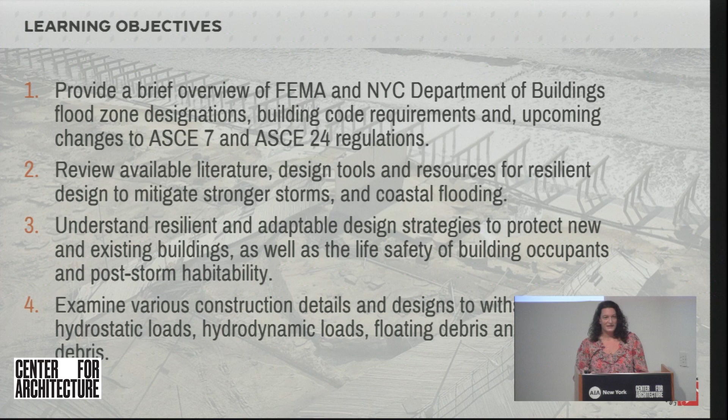We are going to be talking about resilient design, in particular with flood and hurricane mitigation projects in New York City. And here are the learning objectives. I won't read them, hopefully you're here so you've read them and you know what we'll be going through.

So like I mentioned, I'm a Senior Project Manager at SGH, particularly focusing on the building enclosure, building technology side of things. A mix of new design, investigation, rehabilitation, and custom glazing systems.

Edwin Tang is the founding principal at Tang Studio Architect, and he sits on committees for New York City Construction Code Revision and ASCE 24. He is a certified floodplain manager with the Association of State Floodplain Managers.

Daniel Kinsley is an associate at GMS. He's in the Building Envelope Consulting Group at GMS and has worked on a wide variety of projects, including facade restoration, repositioning, overcladding, as well as new construction in the commercial and residential markets, featuring designs in curtain wall, precast, and masonry.

And last but not least, we have Jessica Mandrick, a partner at GMS, who has provided structural engineering services for numerous buildings located in hurricane and flood hazard areas. She served on the ASCE 24 Urban Flood Study Team after Hurricane Sandy and assisted with Sandy recovery efforts. She is Vice Chair of the ASCE 24 Flood Resistant Design and Construction Committee, a member of the ASCE 7-22 Flood Load Subcommittee, and Vice Chair of the New York City Building Code Flood Resistant Construction Committee.

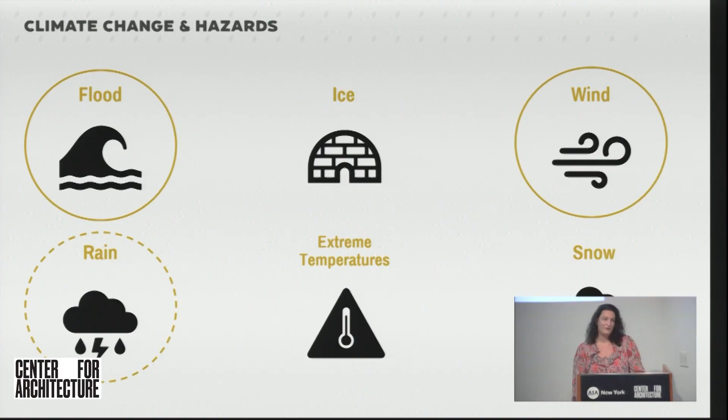There are multiple hazards. As I mentioned earlier, we'll be focusing on flood and wind tonight, including rain, because that affects flooding and is often in combination with high wind events.

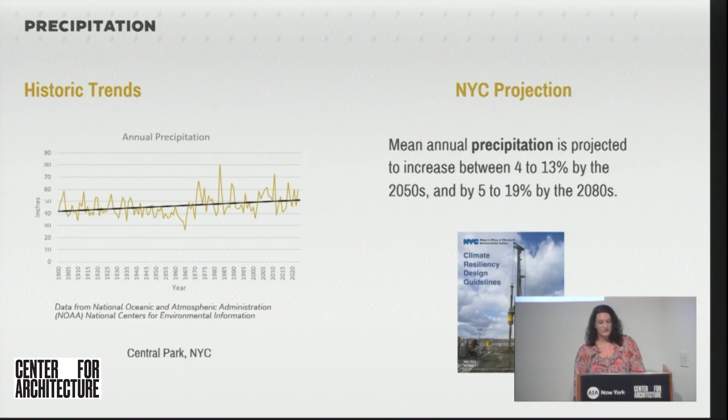With precipitation, we see similar trends. They're increasing through the years. The mean annual precipitation in New York City is projected to increase between 4 to 13% by 2050, and by 5 to 19% by 2080.

And we've seen these storms, right? Winds and high winds and intense storms. We anticipate that they will continue to increase in frequency and intensity through the years.

As I mentioned, current codes are primarily based on historic data. They don't account for these projections. They don't account for the trends we've all been seeing and living in recent years. There are, however, codes and standards that committees are in the process of accounting for these future projections. They're just not quite there yet.

So we're anticipating in 2028 an edition of ASCE 7, which provides loads for designing structure and components and cladding, and that this version will include some of these projections for changes we've been seeing in flood and snow and rain and ice and wind. So that's kind of what the future holds.

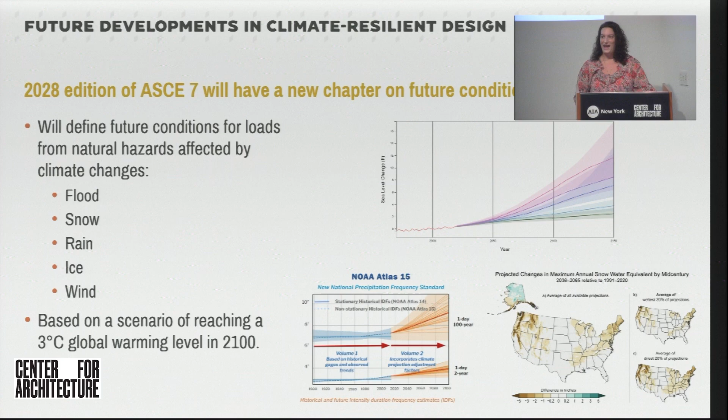This is your introduction to hazards and climate change, and I will pass it on to Edwin for his portion of the presentation.

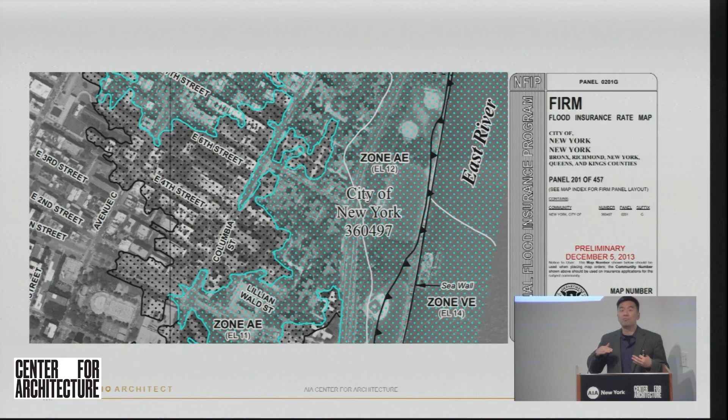From the flood maps, you know where you are and the elevation of the water that you have. As a design professional, there's other information we have to collect. We need to know the grade elevation that your site is situated on, and also you need to know the codes.

The current codes have been revised. Pretty much whatever your flood zone is, the codes require an amount of freeboard that is usually 2 feet for most occupancies. You basically subtract the grade elevation from your flood map to determine how high the water will be against your building envelope. That's called flood depth.

Here's a project that I worked on, on the west side of Manhattan. It's a slope site, so from the maps I know that my design flood elevation is 14. I added 2 to the base flood elevation of 12 that I read off the map, then I looked at the architectural survey for the grade elevations.

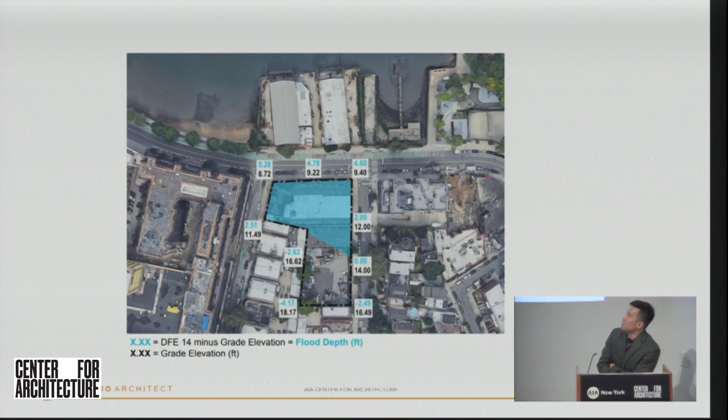You can see the black numbers as the grade elevations, and you can see that as you go inland, the land is higher. The blue represents the flood depth, which is the design flood elevation minus the grade elevation — that's how high the water is. There's a point where it becomes 0 as you're midway uphill; that's the 0,0. The negative just means the water will never reach that area of the site. So this is how you first understand how high the water is around your building.

Then you look at the relevant regulations, and there are quite a few. It starts at the federal level with FEMA and the National Flood Insurance Program. They publish a series of rules and guides for what you can and cannot do to qualify for flood insurance, which is required for sites located in flood hazard areas.

Then at the state level, it sometimes impacts a project if you're located near tidal wetlands or freshwater wetlands — there's additional regulatory hurdles to go through. The local level is usually the most intense; you're dealing with regulatory agencies of New York City, the buildings department, the fire department, transportation, and also city planning for zoning.

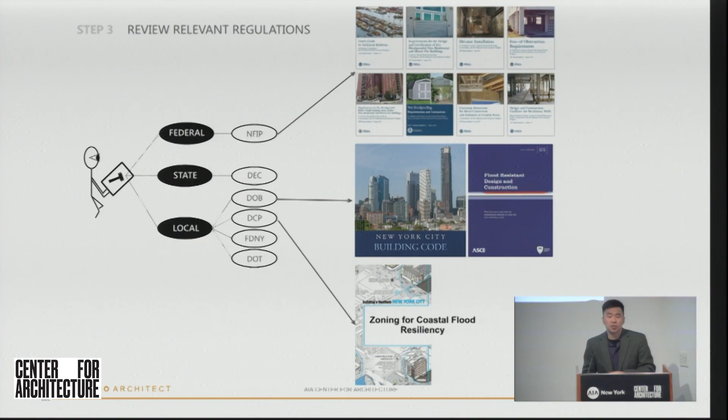As far as identifying your adaptation strategy, at a very high level there are two categories of projects: those that trigger compliance by the nature of the work, which is either new construction or buildings that are substantially damaged or substantially improved. If you're in that category, the standards and codes apply to you. So for residential and non-residential uses, you can always elevate your lowest occupied floor to be above flood elevation.

But when it comes to intervention measures for flood resiliency, if you have spaces located below design flood elevation for residential use, your options are very few. You can only wet flood proof, and you can only have spaces that are parking, storage, and building access — basically no occupied spaces.

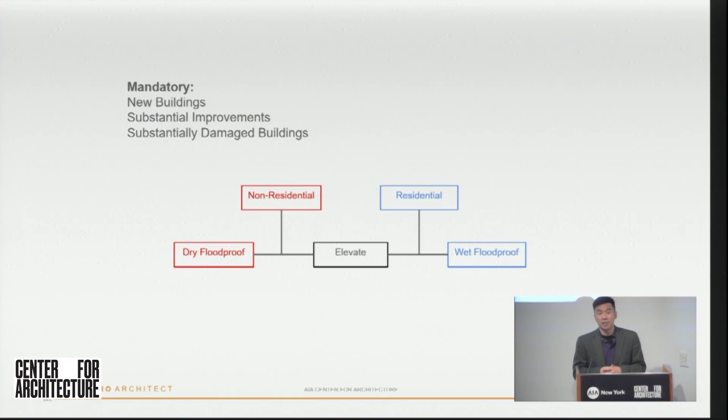If you have commercial or other non-residential uses that are below grade, your only option really is to dry flood proof. We'll go into what wet flood proofing and dry flood proofing means, but it's important to understand that you can always elevate, and that's the passive approach.

Now, there's also a category called voluntary flood hardening, and that's when you have a building that doesn't trigger compliance, meaning the scope or area of work is small. You're in a flood zone, but because your scope is so small, you're not forced by the codes to comply. In those instances, as a building owner, they still want to have some protection.

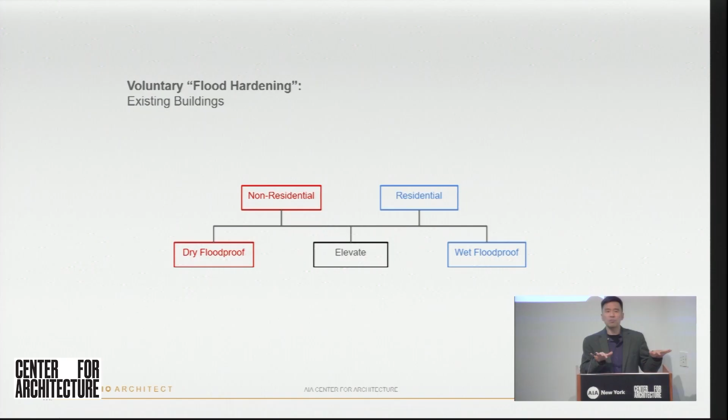In the old days, it was sandbags. Nowadays, there's a lot more products on the market that allow buildings to protect themselves. In that category of voluntary, you are a little more free to choose different options because it's not required. It's more of a voluntary approach. So all these options of wet flood proofing, dry flood proofing, and elevation are available.

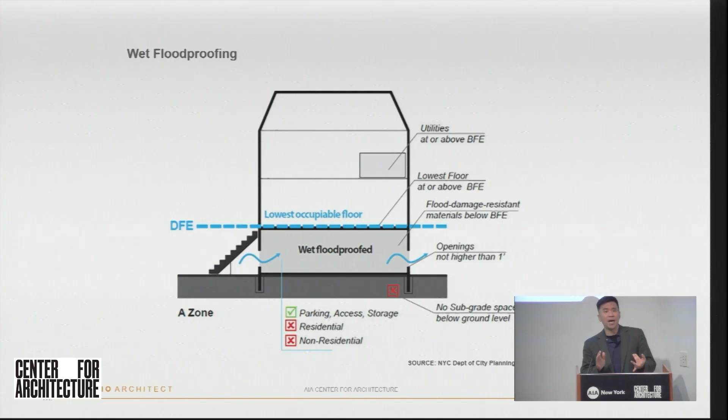So just to kind of quickly review, what does it mean to wet flood proof a building? Essentially, you're letting the water into the building. The reason you do that is a lot of these existing buildings or structures designed before flood regulations came into play were not designed for lateral loads from water—hydrostatic pressure, hydrodynamic pressure, floating objects that may impact the side of your building that's not designed for seismic or any kind of lateral load.

If you don't do this, what happens is water will build up on one side, the exterior, and exert pressure against the building wall that may cause it to collapse. In order to avoid that, wet flood proofing mitigates that uneven pressure to create a balance so you don't have uneven loading against the wall.

And the vents have evolved to have more options. Some are insulated, some are ventilated, some are fire rated in certain instances that require fire separation. And these are all passive.

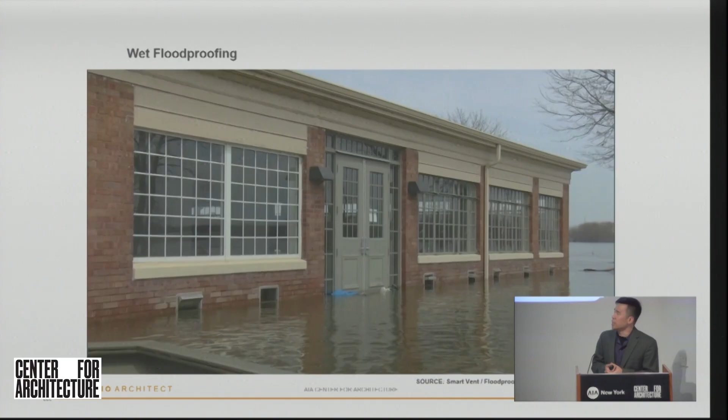The way they work, there's a formula based on how much water is anticipated and the area within the building that needs to flood, and the formula tells you how many of these openings you need to provide along your facade. The standard is you always have to have 2 openings. They normally need to be on 2 separate walls, to prevent them from clogging or getting blocked—it's just a kind of backup.

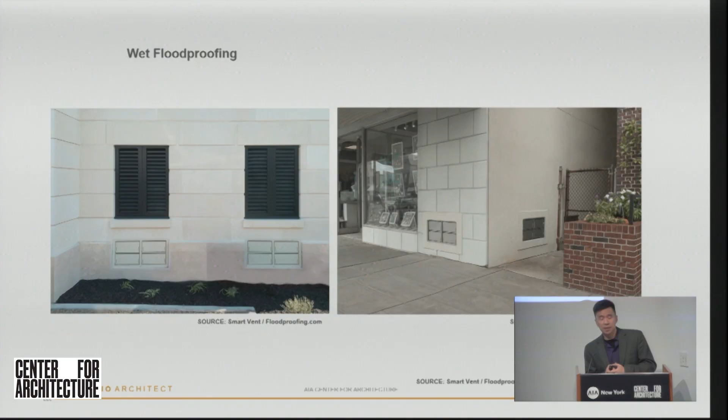A lot of times, depending on how much area inside the building needs to be protected, one vent may not be enough. You may need to stack them in an array and have multiple openings to meet the required area.

And then dry floodproofing—it's just the opposite. Don't let the water in, keep it out. You're keeping the spaces dry that are located below the flood elevation, and that's not only above grade, but also below grade.

So these are more involved as far as structural design. You need to make sure the building can take the loads. And there are basically 4 types of load from ASCE 7 that apply to these situations.

It's hydrostatic, which is still water; hydrodynamic, which is waves; impact loads, like floating logs or floating vehicles; and then you have wind loads too. So when you design, you talk to the structural team, and as they design it, they have to apply all these loads simultaneously.

So there are 2 categories of dry floodproofing options on the market. They're broadly categorized as active measures, which require human intervention and a flood emergency plan. And then you have passive options, which do not require human intervention—they basically are a set it and forget it approach.

Like you have the flood barriers that are embedded into the grade, and they're actuated by water—the rising water will cause this gate to lift automatically. And you have flood resistant glazing, which has nothing to do, doesn't move, no moving parts.

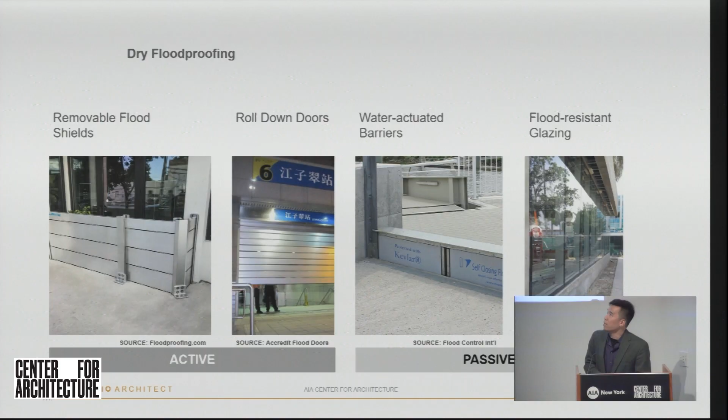So from my experience dealing with projects, both from the regulatory side at the city and also in private, most building owners will elect to use flood shields because they are the most economical, the least disruptive as far as architectural impacts to the facade, and also they are kind of simple to install.

So I'm going to speak a little more about temporary removable flood shields, the very first one on the left.

These are usually aluminum planks to be lightweight, so that it's easy to carry out of storage, and they have rubber gaskets all around them. When you elect to use this option for protecting your building, you're required to provide a flood emergency plan, which is a big manual that shows you - I'll give you an example at the end of what it means.

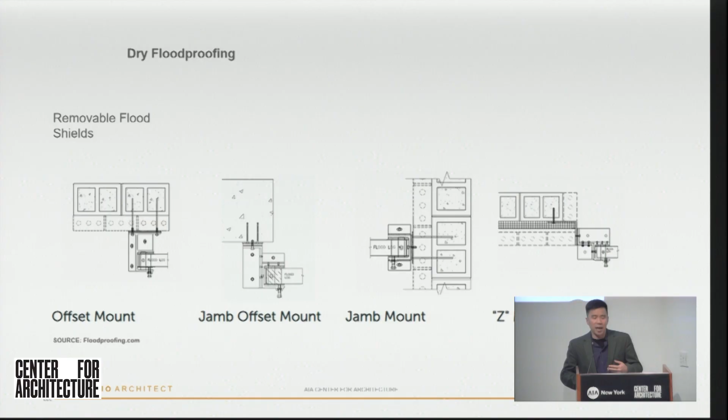It requires drills, storage, tools, and trained personnel to deploy them and know when to deploy them. There are so many vendors of these products right now. These are examples of how you can architecturally hide the embeds because they attach to the building, both on the walls and also where the spans are longer - there are intermediate posts with embeds usually in the sidewalk. So here are some details for connections to the facade and to the sidewalk. These are all usually engineered by the vendor and suited to be compatible with the architectural materials and language of your facade.

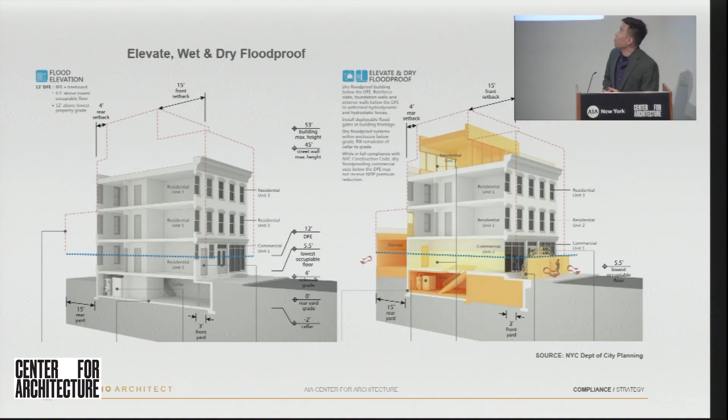Once you know the strategies available to you as a design professional for your project, you have to design your building. So here's an example of a mixed-use building. You have retail on the ground floor, residential on top. As we apply the concepts, you can only dry flood-proof commercial, so you see the flood shields, and you're required to maintain egress after the flood shields are up - so you have those crossover stairs. The residential units are elevated, and the lobby needs to be wet flood-proofed. Any subgrade spaces can only be for commercial use because you're not allowed to dry flood-proof residential where you are triggered to comply. Again, if it's voluntary, you have a little more leeway.

Let's look at a real project that I worked on - a new development in Brooklyn. It's a double corner lot, residential with ground floor retail. Since it's new construction, we have to comply - we don't have a choice. So residential needs to be wet flood proofed, residential portions and spaces in the building, and non-residential spaces can only be dry flood proofed.

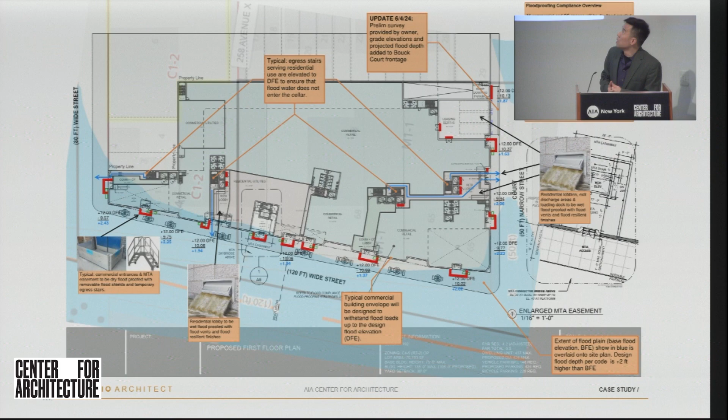Then you have the areas with the blue arrows - those are the residential lobbies and exits. By code and by the standard, they have to be wet flood-proofed, which means water is allowed to go in and out without human intervention. So they will have flood vents at the doors, at the glazing, at the envelope.

There was also an MTA easement at the middle of the building, which also is to be dry flood proofed. So we have those flood shields. The design elevation is 2 feet above grade, the flood depth - so two planks and the crossover stairs.

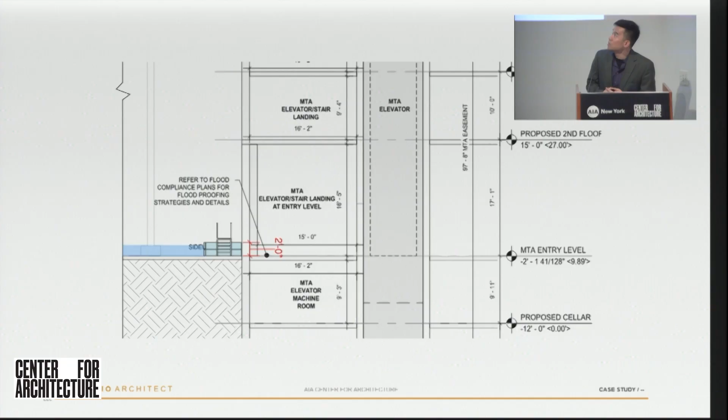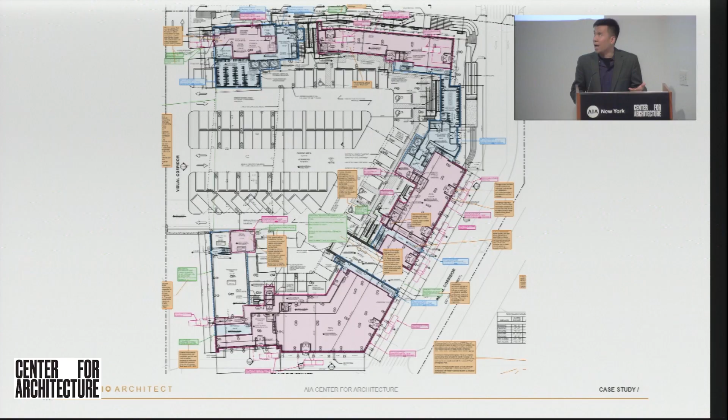The interesting thing for this project is because it's a government subsidized or government funded project, they elected to plan for future sea level rise. So the design flood elevation is a minimum - it doesn't mean you can't go above it. The solid blue line is the code minimum design flood elevation you have to design to. The dashed blue line is what this project owner decided to protect against - a good 6 feet above the minimum, planning ahead for the future.

So their residential areas are wet flood proofed to 6 feet above the minimum. The red is the commercial spaces - because of tenant sensitivity and insurance concerns, commercial tenants chose to go even further, up to 8 feet above the minimum. This shows you how some projects will go above and beyond code.

And the other reason was it ties into the zoning floor area calculations as well, because wet flood-proof spaces have a lot of options for floor area deductions. So by deducting entire levels on grade, you can get additional floors, additional square footage for the project.

There are some gaps right now. A lot of the regulations deal with coastal flooding.

Here's another case that I worked on, a project in a shaded X zone where there is no base flood elevation on the maps, and no code requirement to provide flood proofing, unless it's institutional or hospital occupancy. This is a residential mixed-use occupancy. They technically didn't need to provide flood proofing, but they are located right at the boundary between an X zone and an A zone, which has a flood elevation and requirements.

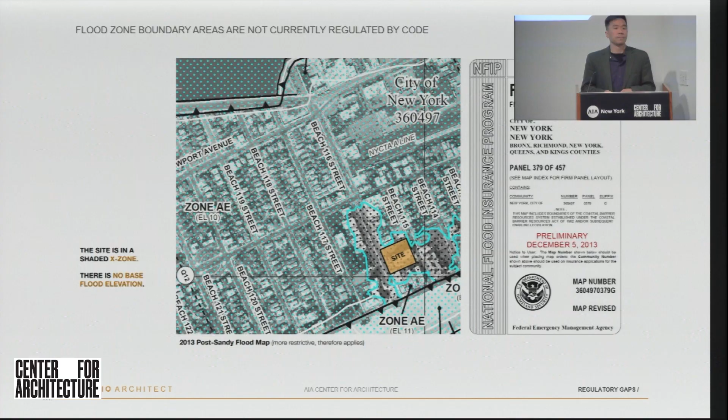Yeah. Insurance issues are also there. Excuse me? Insurance issues also there. There's an insurance issue there? Oh, yeah, insurance issue, for sure.

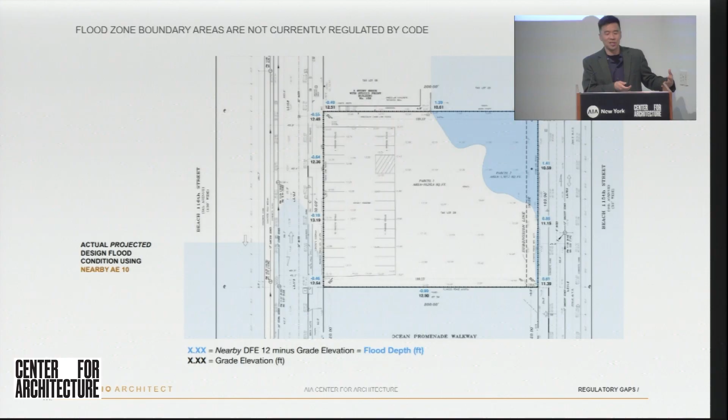So here, the client decided, per my recommendation, to provide for this reality, because the project is subject to flood even though the map says it's not. So this is kind of an interesting gap that exists. A lot of the FEMA maps are talking about coastal flooding, sea level rise, and storms.

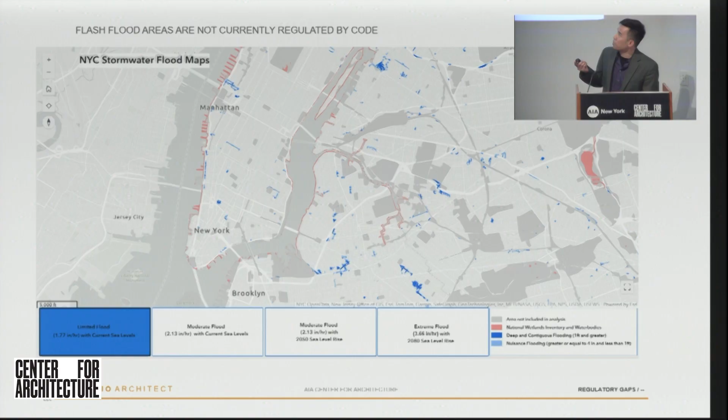But the reality is, as you may have heard in the news, there are instances of flash flooding inland away from the coast, and the FEMA maps will not cover this. New York City has started to map these areas based on incidents. Currently you have low risk, and as you go with the projections toward extreme scenarios in 2080, you really see a lot of pockets of inland areas subject to serious flooding. That's currently not in the regulations.

There are efforts throughout the city to start planning for this. Especially for HPD projects, where they elect for enterprise green community incentives, there is a design criteria for stormwater management. So you need to design for your site — if it's really sloped, with driveways going underground, you need to deal with that anticipated storm flow.

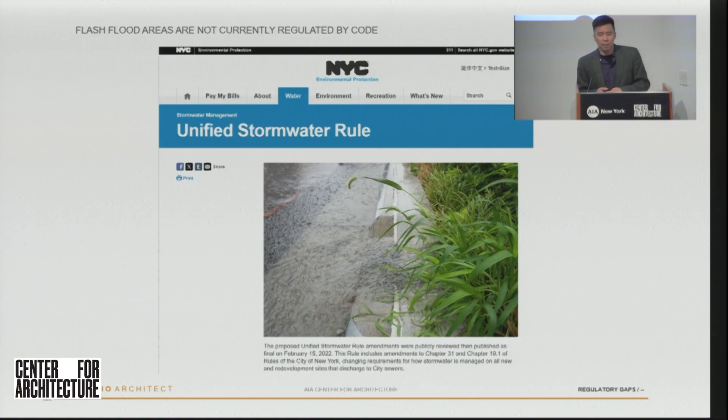The city also has a unified stormwater rule through DEP, but that's more geared towards infrastructure and streets. There's no direct mandate on a specific site to deal with this.

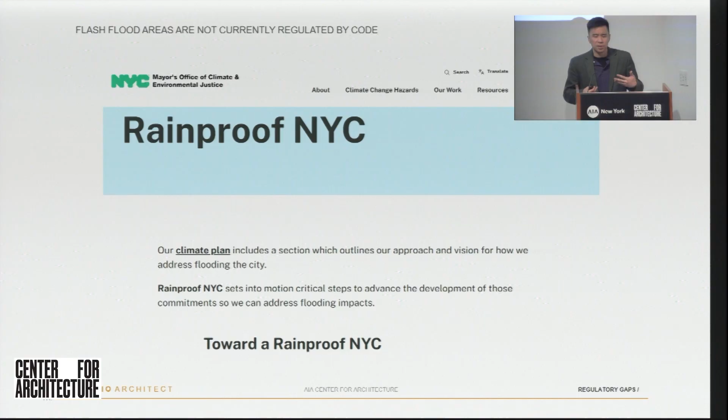There are also efforts from nonprofit groups to develop recommendations for how to better address flash flooding in the city, in partnership with the mayor's office. There's an effort with Rainproof NYC to start developing criteria for how to protect against this.

You need to rehearse, get your supplies and your actors in place, and then it sits idle for years sometimes. People turn over, the gaskets wear out after a few years and don't work, someone loses a few pieces. What good is it if you spend all this money as an owner to provide this, but then it doesn't work when you really need it to? That's probably the biggest challenge I've seen across many projects.

And this is just another interesting case that I deal with a lot on projects in the city. I mentioned earlier when you have flood vents for wet floodproofing, they have to be on 2 walls. Well, you have a lot of attached buildings in New York City. There's only 1 wall, so what do you do? I don't have 2 walls.

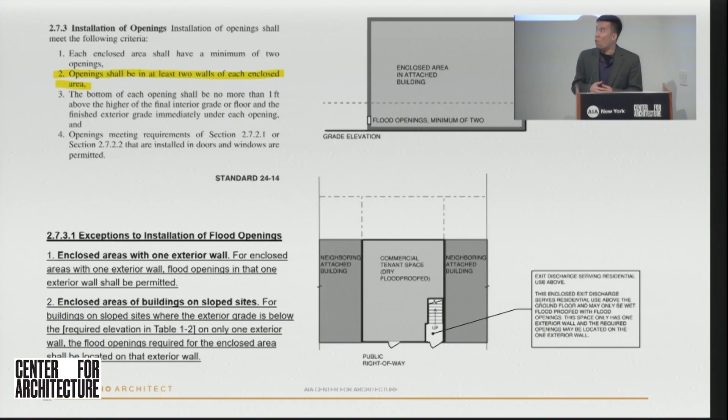Or I'm on a sloped site where the back wall is higher and the flood water will never get to the back. So what good is it if I put my flood vent in the back? So we made a proposal in ASCE 24 to allow certain instances where there's only 1 wall that makes sense to put all the flood vents in that 1 wall.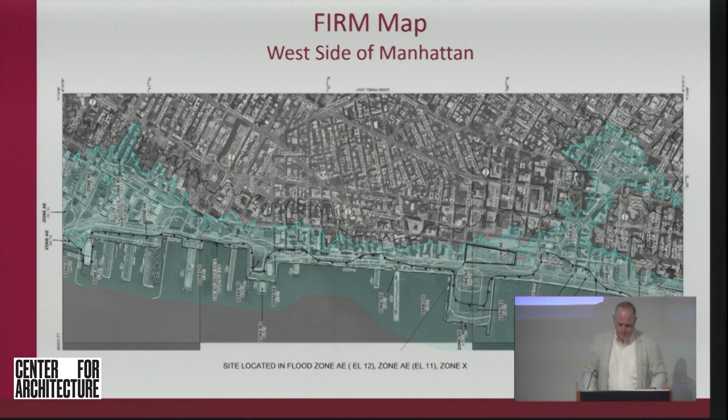So wet flood proofing, we talked about this a little bit. As we heard earlier, the rising floodwaters apply pressure to a building structure and cause damage. The hydrostatic pressure of water pressing against a foundation can cause entire homes to dislodge from their foundations during storms. The concept of wet flood proofing is to eliminate that one-directional pressure on a building and allow the water to get to both sides of the wall, therefore equally distributing that pressure and allowing it to rise equally on both sides.

So this first project I'm going to talk about is a residential project with ground floor retail. We spoke about the residential spaces requiring wet flood proofing and commercial spaces having the choice to pursue wet or dry flood proofing. In this project, the architect and the owner elected to use a wet flood proofing strategy across the entirety of the ground floor, both at residential requirements as well as commercial spaces.

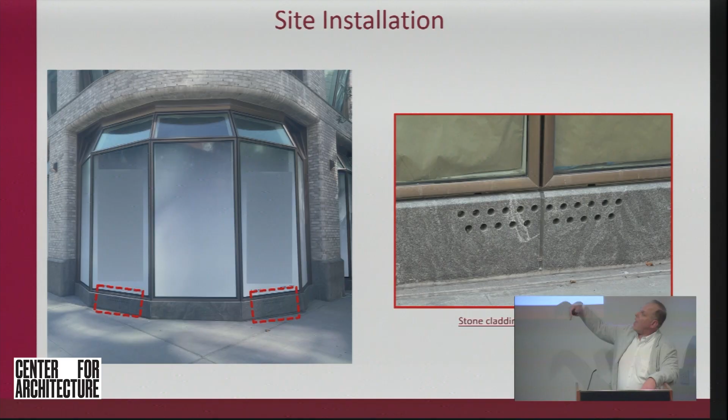So this is the finished example. What you'll see is the glazing comes down on top of the curb down to grade below DFE, and the architect didn't want to see the flood vents, right? They didn't think that was aesthetically pleasing. So what they did is put stone cladding in front of the flood vents and perforated it with several holes that would allow the water to fill in past the stone, fill up the cavity, and then trigger the flood vents and allow the flood waters into the building. Kind of clever.

Now, some of you may be more well-versed in wet flood proofing, so I'm going to spend some time on dry flood proofing applications specific to glazing systems, as it's becoming increasingly popular. Dry flood proofing is, as you'd imagine, strategies for resisting floodwaters and preventing water from entering our buildings.

In some cases, a site's design flood elevation may be 3, 4, or 5 feet above street level, typically meaning 5 feet of opaque surface. Back in 2020, the New York City Building Department, through their Office of Technical Certification and Research, issued a building bulletin to address the increasing interest in using glazing systems as perimeter barriers for floodwaters.

The building bulletin established evaluation criteria for glazing systems using dry flood proofing in special flood hazard areas, also known as flood-resistant glazing systems, designed to meet the definition of substantially impermeable and to resist site-specific design loads pursuant to ASCE 24. The main performance criteria referenced in that bulletin is set forth in ANSI FM 2510. ANSI is the American National Standards Institute, and they partnered on this standard with Factory Mutual Standards, or FM Standards. FM Standards is a research and testing arm of FM Global, a major international property insurance provider. FM Standards independently researches, tests, and certifies products used to protect facilities.

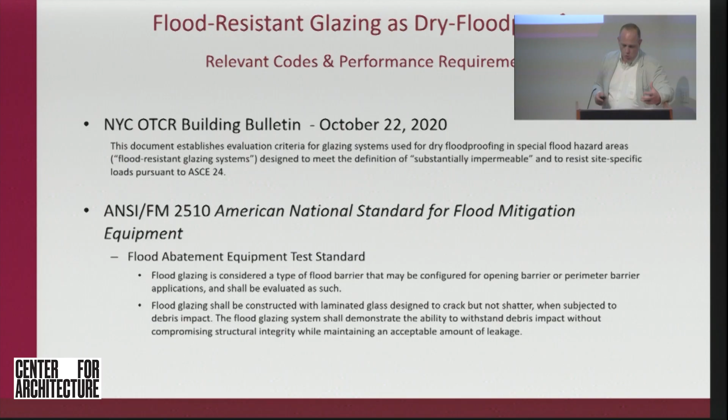We're going to take a look at two project examples that took slightly different approaches to meet this requirement.

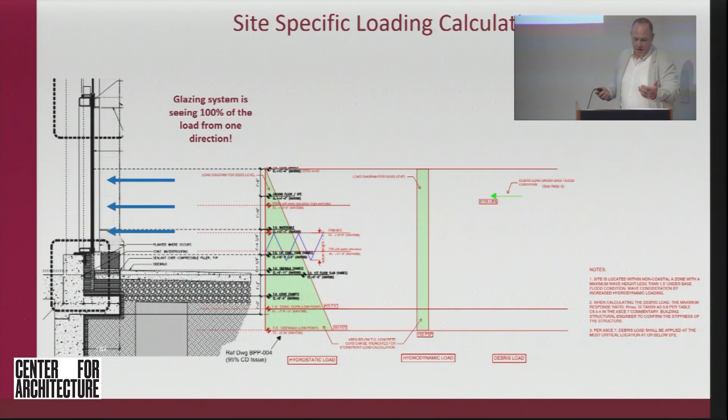The key to this project is using a previously tested system, and I'll get to that in a second. In this section, the detail you see is an example of the calculations put together for a site-specific loading diagram here. The hydrostatic loads, the hydrodynamic loads, the debris loads—all pre-calculated before we get into design. Our next speaker, Jessica, will get a little more into that.

The architect had chosen to—wrong spot there. Per the FM ANSI standard, as I mentioned earlier, laminated glazing is required within flood-resistant glazing systems. The standard says glass is allowed to crack during a flood event, but not shatter. That's mostly due to the debris.

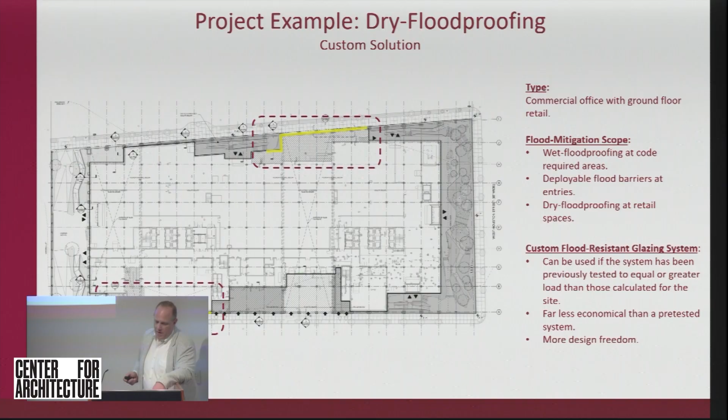That's in some locations. Some of those locations were designated for retail, and the architect and owner did not want 6 feet of opaque surfaces before vision glass started. Prospective retail tenants would prefer pedestrians could look into their spaces from the sidewalk, which is understandable.

This meant lowering the sill of the existing openings below DFE and developing a custom storefront system to meet the flood loads.

The system is structurally glazed with steel mullions. The steel is more robust than your stock aluminum extrusions and can handle the heavy loads calculated for this site, plus the wide spans — we had some openings that were 20, 22 feet.

The glazing resists the loads, transfers it to the steel, and the steel transfers it to the columns and the flood walls that surround them. There's an aluminum extrusion beauty cap adhered to the glazing to match the aesthetic of the standard storefront above, which has your standard extruded beauty cap.

Unlike the pre-tested system, there were more options and customizations here. It just meant it had to be tested. So that's what we did.

The OTCR bulletin requires lab flood load testing if the system is not pre-tested, according to the ANSI FM standard. For this project, a custom mock-up was constructed and installed in a testing laboratory.

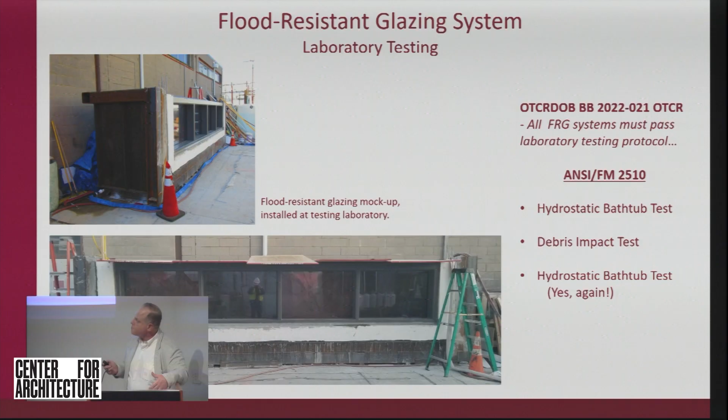As you can see on the left, the tub is being filled with water. The water is left to rest against the system for 24 hours, and they measure the leakage through the system. The allowable leakage is less than a tenth of a gallon per hour per linear foot — very little. There is an allowable amount since nothing is deemed impenetrable, so they do allow a small amount to leak through.

Once we pass that, you move on to the debris impact test. Here they're simulating a telephone pole: they've taken a piece of wood and mounted it to a metal hammer, lifted it on a lift, put it inside the tub, and simply drop it. It's very simple.

They drop it against the glass, and sure enough the glass breaks — the outer light breaks, and there were some small cracks on the inner laminated light, but that was expected. Once that's done, they fill the tub back up with water and let it sit for another 24 hours, testing the leakage again, because even after the damage, the system still has to perform.

Okay, now the testing is complete. These units start to be fabricated and installed out in the site. On the exterior, you can see the location of DFE +1, and that's the separation of our system. And you can see the separation of the flood glazing and the typical system. From the exterior, they look pretty much the same.

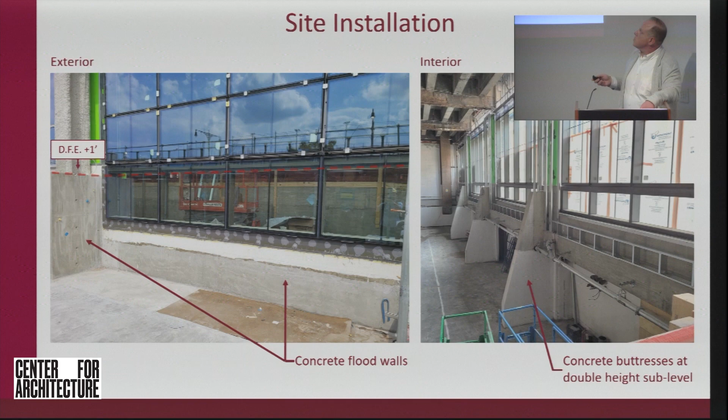During a flood event, the flood-resistant glazing transfers the load to the columns, as I said. In this case, the loads that were calculated were rather high, and we have this double height cellar space in one retail space, so that the sidewalk is actually right up here. Because of the loads that were calculated and how this structure was built, they actually added concrete buttresses to reinforce the columns on one side of the building.

So these are just a couple of finished photos from the exterior. As you can see afterward, you can see where the DFE is. You can see the separation between our flood-resistant glazing system and then a typical stone-clad concrete wall. It actually came out pretty good, I think, and it looks pretty seamless with the typical storefront above.

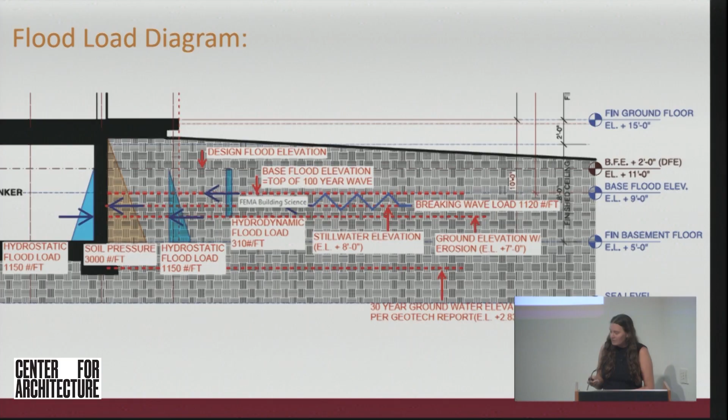In structural design, this is one of the most critical elements, because when piles become exposed, their capacity to resist lateral loads drops. The pile is in bending, and the bending of the pile controls the design of the pile. You need a lot more piles to withstand the lateral load. In most of the projects that I've done, the controlling factor for flood design is what lateral load the foundations can resist.

In terms of a dry flood-proof structure, we talk about buoyancy. In order to resist uplift, to prevent the structure from floating like a boat, the concrete is tied down to the piles with a tension connection. This is an example in a wood pile of a tension attachment. These plates are bolted through the pile. You can stick up to a number 10 rebar through the holes in the plates and engage the piles if there's an uplift force on the foundation, if your building doesn't weigh enough to resist it from floating.

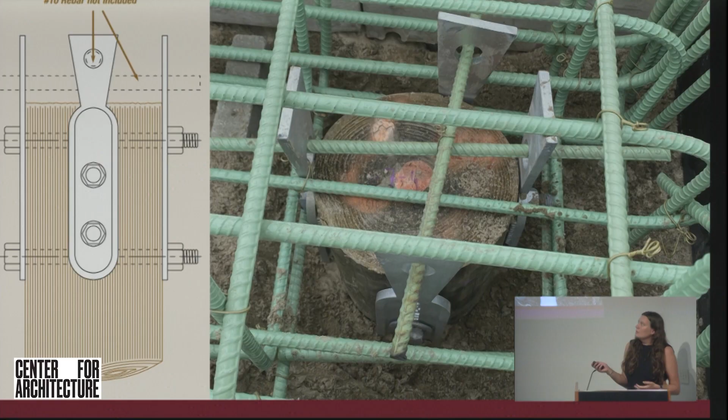For piles, typical construction in a coastal area is a timber pile. Timber piles may not have the bending strength to handle this elevation of the soil being scoured. This is an example of a cast-in-place concrete auger cast pile. You can see there's a cage for the top 20 feet. This pile had about 5 times the lateral rated capacity as the timber pile in the same scour conditions.

This is an example of a dry flood-proofed structure. This is a bunker. You can see here this is the mat foundation. There's a rat slab poured, the rat slab is waterproofed, and the mat foundation is placed above the waterproofing. You can see rebar that's extending up into the mat. These are connected down stirrups that connect to concrete surrounding the piles to engage the piles for uplift.

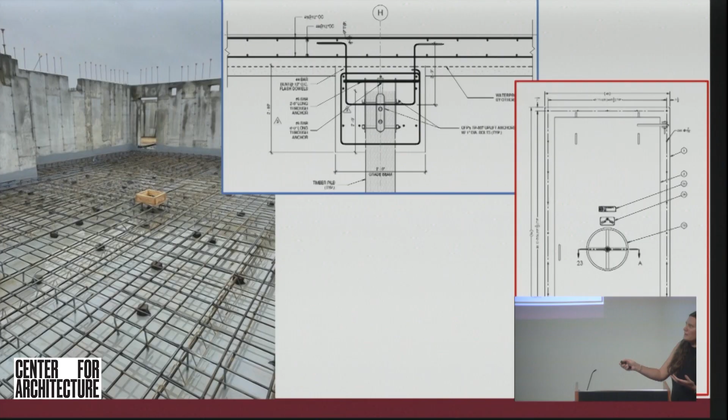You can see in the background there's an opening for a door. If you're doing a dry flood-proof space, a bunker below grade, you can use a flood-resistant door. They look like a submarine hatch. And you can see that any openings out of this mechanical space are at the top of the walls, above the design flood elevation.

In a hurricane, the glazing is often designed to be hurricane-resistant glazing. This is rated for a specific mile per hour and for debris impacts. Each manufacturer that tests this glazing will specify a certain number of attachments around the perimeter of the glazing. What happens when you have multiple panes of glazing together? Sometimes you need to add a structural attachment. This is an example of a plate that was between glazing elements that this glazing edge can connect to with the attachment that's required for the hurricane rating.

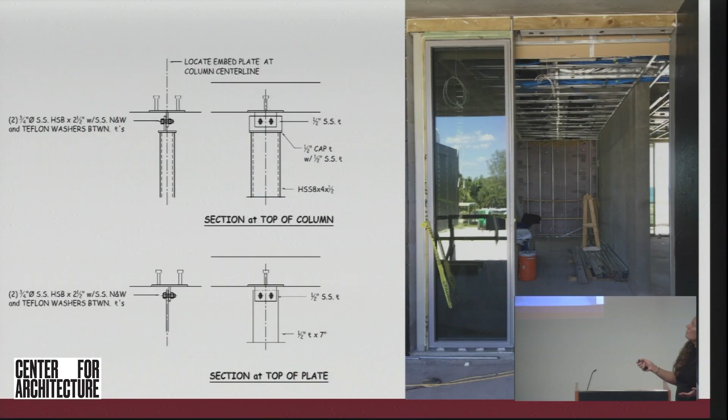When there's a larger space available, you can use a tube. So there's a tube on the left, there's a plate on the right. These have slip connections so that they don't transfer gravity load to the plates from the floor above and buckle them in compression, but they have the bending capacity that's required for the load for the hurricane-resistant glazing.

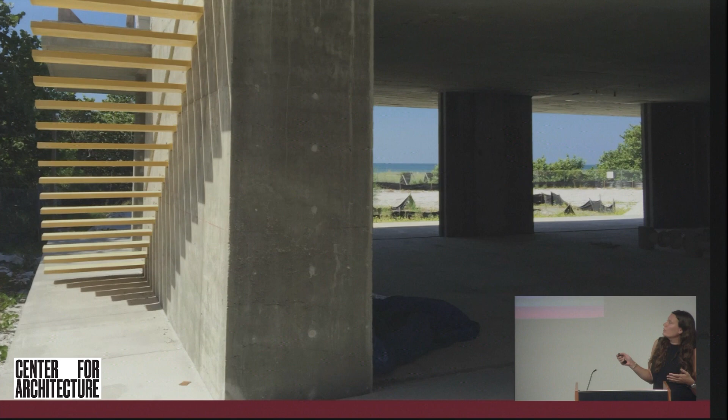This is an example of an elevated structure. You're allowed to have stairs that extend below the design flood elevation and remain in place. This is an open riser so that the flood water can flow through. This structure is elevated. On the next slide, you'll see that pier. It's actually not a solid concrete pier because that would attract too much flood load.

There's actually a breakaway panel in the middle that would be knocked out in a wave impact or in a flood, so that only the concrete on each side is subject to flood loadings, reducing the total overall load on the structure.

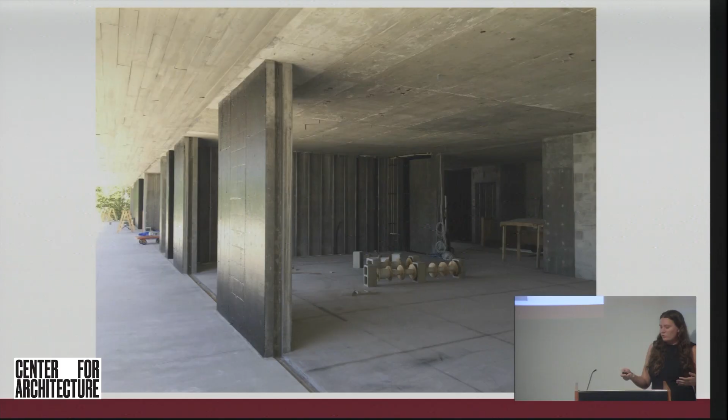So those are a few structural items. Now I want to talk about where the code's going, what's happening next.

So historically, everything in flood has been based on NFIP. The National Flood Insurance Program started after Hurricane Betsy. People were sick of having flood losses. The government stepped in to offer this program. You pay for insurance, you can have your losses covered. And the program was fairly successful initially.

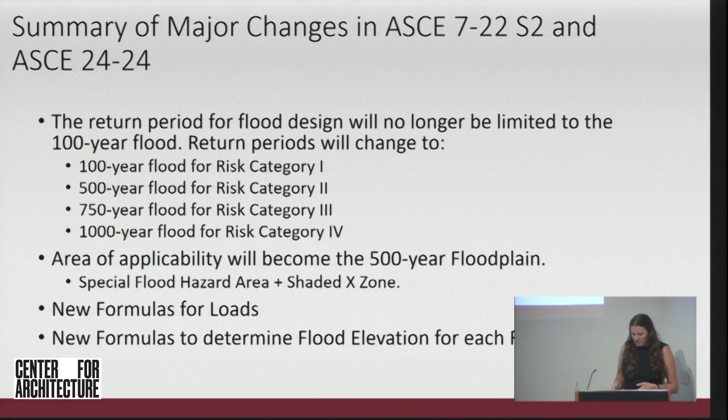And so you have these areas, high density areas in lower Manhattan that don't have any protection requirements, whereas the building next door to them has to add 2 feet of freeboard. And that's a more restrictive design than, this elevation is actually lower than that site plus 2 feet of freeboard. So it didn't make any sense that the 500-year floodplain didn't have flood load design.

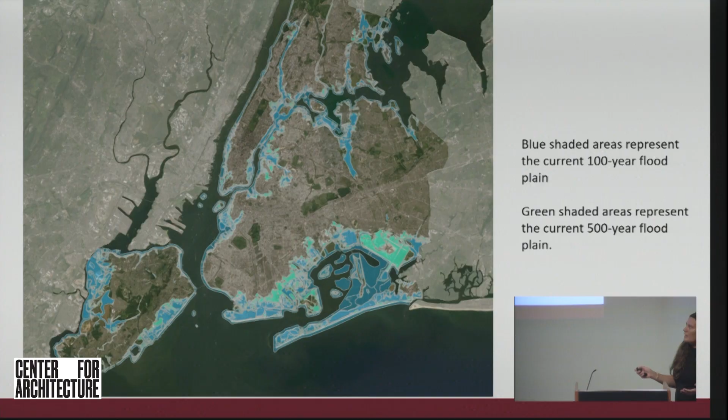This is an overall view of New York City, just so you can see the extent of the area that would be affected. This is around the airport. There's a lot of residential areas in Brooklyn that are in the 500-year floodplain, and then smaller areas of applicability along all the coast.

When we look at the probability of flooding, one thing we have to think about is, you think 100-year flood, oh, that only happens every 100 years, that's rare. But you have to add the number of years that your structure is going to exist. So if you're looking at a 100-year flood with a 50-year service life, there's a 39% chance you'll see the 100-year flood. Whereas if you move to the 500-year flood, there's only a 10% chance the building will experience that flood.

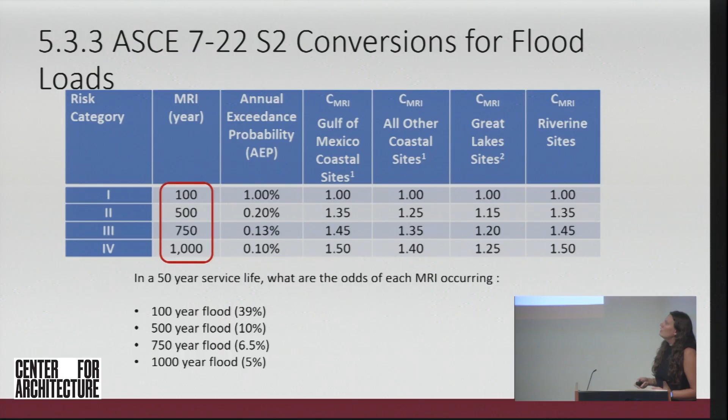One thing the committee for ASCE 7 did was try to create scaling factors. We worked with the Army Corps of Engineers, who have done big comprehensive studies, and looked at different regions to fine-tune the coefficients based on where the sites were located. It's different if you're on a river versus on a coast. But for the 100, 500, 750, and 1,000 year flood, we created multipliers. If you know your elevation under the 100-year flood, you can use this multiplier to get your elevation under these higher return period floods.

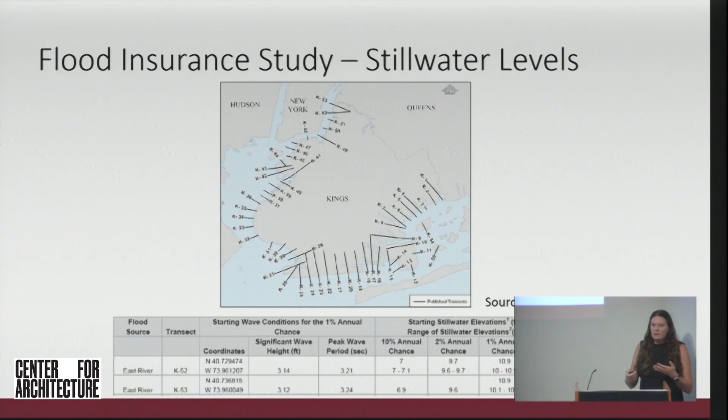All of these calculations are based on the still water depth. The number on the FEMA flood map is the top of the wave, and it's hard to scale the top of the wave because everybody has a different water height and wave height—sometimes the wave could be a foot, sometimes 8 feet. So all these scale factors are based on still water elevation. Where you're used to going to the map, now you're going to go to your flood insurance study, which has the still water elevation for your 10-year, 50-year, 100-year, and 500-year flood. So you can find the elevation of the still water at your 500-year flood and calculate the wave load your site would experience on top of that.

The standards also added a requirement to consider sea level rise. Right now, as this is the first time it's being incorporated into the code, this requirement is only for the minimum historic rate—you take what the past sea level rise has been and extrapolate it forward. If the polar ice caps melt, these numbers get blown out of the park, but at least there's an initial idea that we should be looking at this, we should consider it. We know what the past rate is, and that's the minimum we should use.

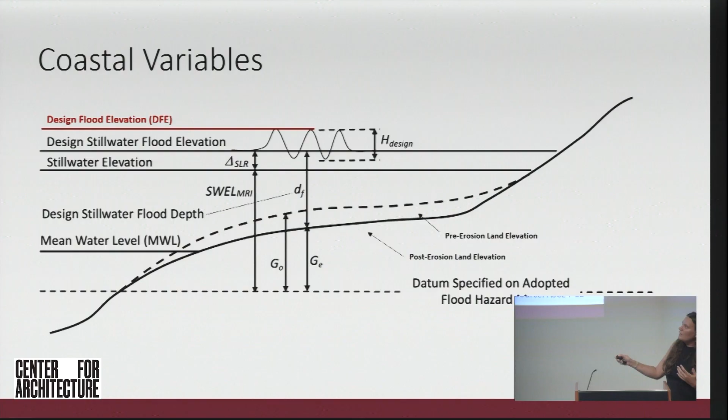So if you take a look at a coastal transect, you're going to have your still water elevation for your return period. You're going to add your sea level rise, compute your wave, and the top of that elevation is the equivalent new design flood elevation.

Another item added in ASCE 7 is debris damming. Debris damming is when your columns are so close together that debris starts piling up against them, requiring you to add hydrodynamic loading if columns are spaced closely together. If your columns are less than 10 feet apart, you need to consider that 70% of the area between them could be blocked by trees, cars, and debris, serving as a sail area for a load. If your columns are 30 feet apart, you don't have to consider debris accumulation because they're far enough apart that it can get through.

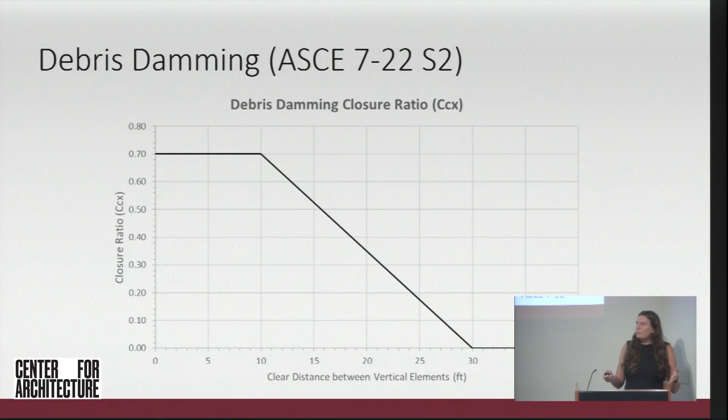There's also revised formulas for wave loads. Before, the wave load was just a single force applied at the still water level. Now there are pressure diagrams. If the wave goes over the top of your structure, you can truncate it, and if the wave goes underneath your structure, you can truncate it. So there's new formulas to go with all of these new return periods.

There's also a requirement for what the debris is, and for bigger buildings, there's bigger debris. So if you have a risk category 3 or 4 building, you might need to consider that it's hit by a shipping container or a barge. This requirement isn't applied everywhere - it's applied based on where your site is located. If you're near a shipping container yard, there's a radius your debris can travel over water and a radius it can travel inland, depending on the density of the environment. There's now much more guidance on debris loads for buildings within the code itself, not just the commentary.

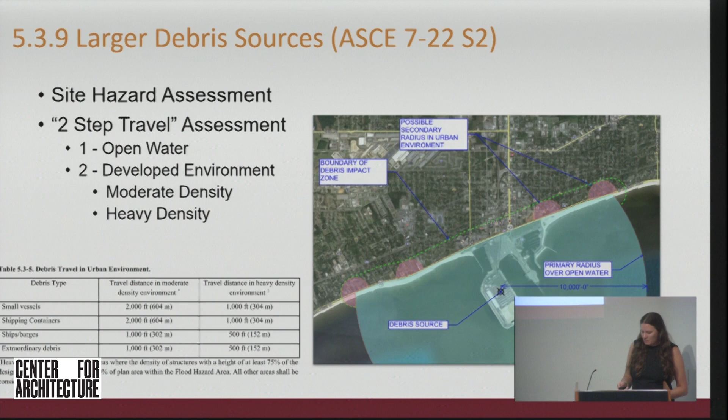So that was from the engineering side, ASCE 7. ASCE 24 sets the elevation that buildings are elevated to, that the floors are at. This effort came 2 years later. By this point FEMA had gotten totally on board and supplied a lot of engineering assistance to try to figure out - we have these multipliers in ASCE 7, they're helpful for determining loads, but can we be more precise? Can we find the floor elevations so that you don't have to calculate the wave loads or the flood in order to figure out what elevation to set your building at?

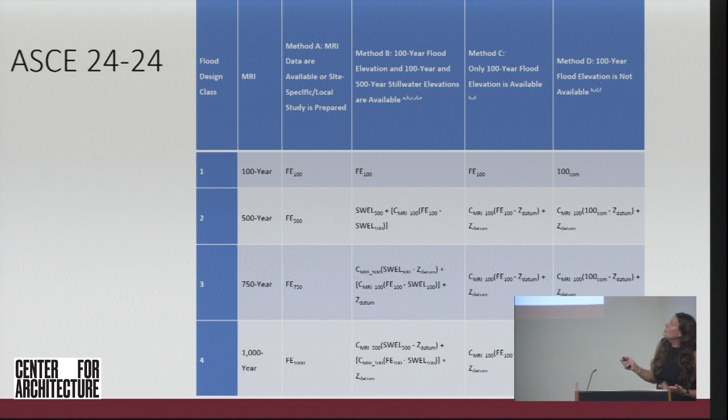They look complicated, but there are these charts, and it's kind of like the more you know, the more data you use. If you have your 100-year, 500-year, 750, or 1,000-year flood data, you can just use that - if a coastal engineer has given you that data, or it's published in a study. If you only have your 100-year and 500-year data, you can take the proportion of those two - they look at the delta between the 500 and 100-year storm, and there's a formula based on those two numbers to figure out your elevation. If you don't have any 500-year data, there's a multiplier using only your 100-year data, and if you don't have any data at all, there's a separate multiplier.

With all of this, there's a study on the reliability. When we design buildings, ASCE 7 has a standard - under an extreme hazard, only a certain proportion of buildings should collapse. We knew that the old standard didn't meet that. One item in the old standard that tried to address this: if you were in the V zone or the coastal A zone, you had to multiply your flood load by 2. Even in an ASD case, the load was factored, because we didn't know - we knew the number wasn't reliable enough, we knew buildings were going to be flooded, and we knew the 100-year return period wasn't sufficient to meet the collapse proportion.

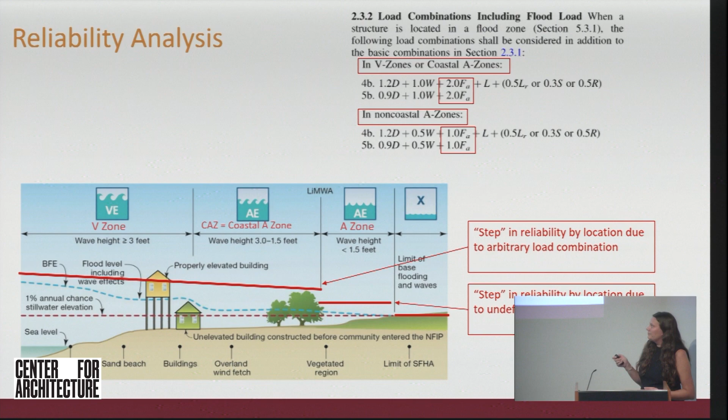Once you dropped to the A zone, that load combination dropped to 1. So if your building was situated between a coastal A zone and a regular A zone, you lost reliability. And once you got to an X zone, there's no design for flood at all. With the new changes in ASCE 7 and ASCE 24, that reliability diagram is much smoother. Now we're using the 100, 500, 750, and 1,000-year flood, calculating the depth at each site. The only drop in reliability happens at the 500-year flood boundary, where we stop considering flood loads, just because of the nature of what we have mapped and what we can use.

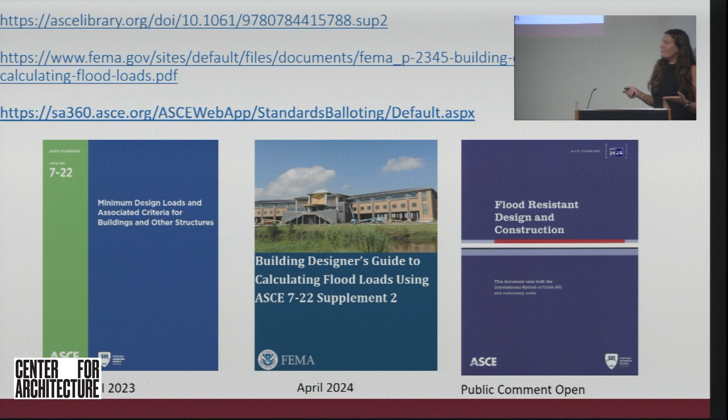All of these standards are available for free. One benefit of having the supplement come out after the standard is they had to publish it as a kind of errata online, so you can download ASCE 7 Supplement 2. FEMA made a building designer's guide as a complement to that, with examples on how to apply it. And ASCE 24 is out for public comment right now - it's available until September 26th. So if you want to see the changes in ASCE 24, you can download it for free in the next 2 weeks. It'll be out by the end of the year.

And then this is just what's to come. All of these numbers are multiplying flood loads by scaling factors to try to determine what your new flood elevation is at different MRIs. FEMA knows they need to actually just provide you that data. So they have this future flood risk data set where they're trying to make it a probabilistic approach, considering stormwater, river, and coastal scenarios, where you can get the actual data at your site. This is a couple years away - they're working on the first pilot projects now. Probably within the next 5 to 10 years it will be available nationally.

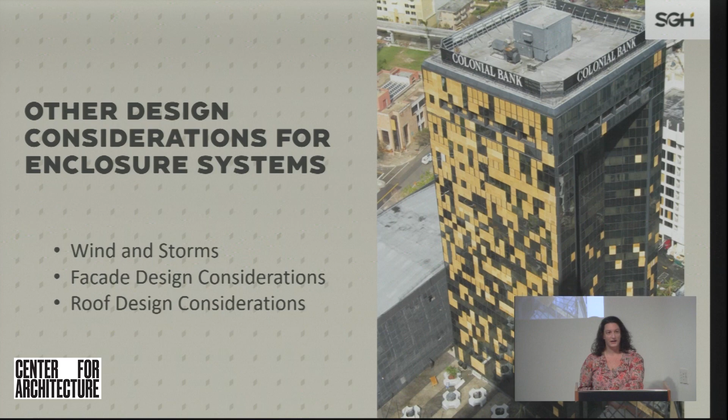As a reminder, the historic trends are increasing for winds and storms. I'm sure you've all seen in the news, you've gotten your notifications about storms, be prepared, wind warnings—you name it. We've been seeing more of it. It's common these days. It's reality.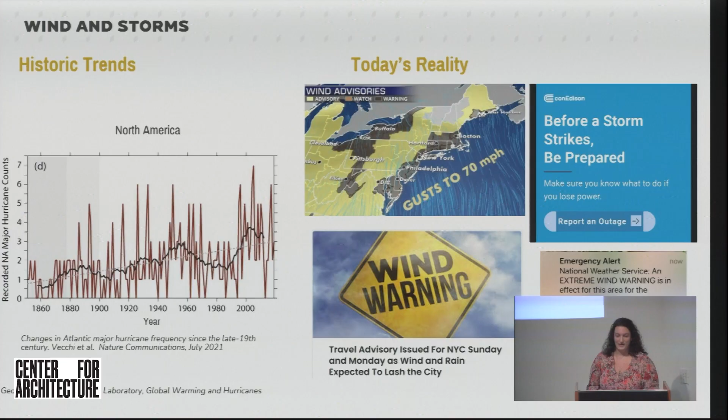So for most buildings, when we have an increased wind event, what do we end up with? We get broken glazing, there's cladding damage, you might have your roof system blow off. You could also get damage to your exterior equipment. Minor to moderate building enclosure damage might be okay, but the minute you get rainwater entry into your building, you've now exacerbated the problem, and it's much harder to deal with after the fact.

Just a note that wind failure of structural systems is unlikely for new buildings. In New York City, we're already required to design those up to 117 mile per hour winds. So it's more the components and claddings and all the other things, not the primary structure.

In this example, we have a building, a 50-story tower in downtown Brooklyn. If we were to design it, one option is to design per ASCE 7-22, your minimum load requirements, but there's another option to do a wind tunnel test. So we had to decide which we would use for our project. The shape of the building is a little unique—you wouldn't necessarily say that it's a rectangle per ASCE 7. It has some corners, it comes in at places.

But what we were most worried about is that there's an adjacent structure, actually on the backside of this building—an arena you might be familiar with in downtown Brooklyn that has a very interesting curved roof. We were worried about the effects from wind over that roof and how that would affect our building, so we convinced the owner to do a wind tunnel study.

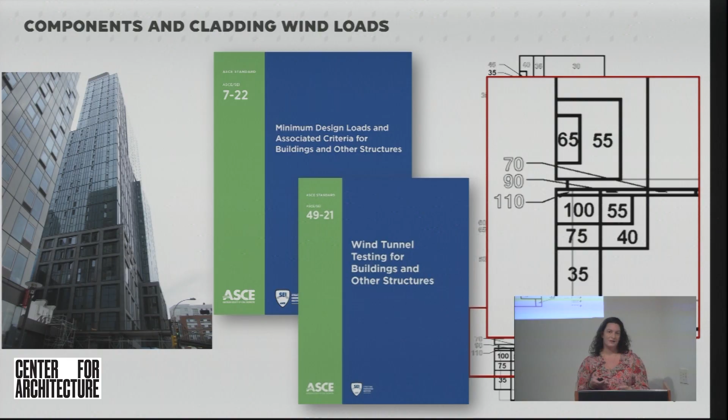So this is just an example to show: you might be safe code-wise to use ASCE 7, and that's okay, but as designers we should really consider the unique shapes of our building and the unique shapes of adjacent buildings and how that can affect our structure longer term.

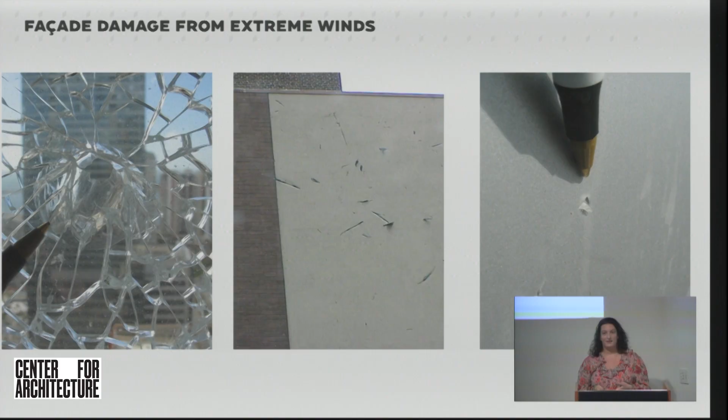Here's just some examples. Broken glazing—full cladding failure off the building is a possibility with high winds. And if you have unreinforced masonry, you could have total loss of your facade in those cases. We have examples of wind-borne debris through glazing, as well as wind-borne debris attaching itself onto your structure. In many of these cases, if it's coming through the cladding like this, it might not be addressed, or ownership might have to figure out how to address it so they don't have fear of it falling on someone at a later date.

When we think wind-borne debris, if you're designing in Florida, it's the first thing that comes to mind. But here in New York, we're not necessarily trained to think about it immediately. What's interesting is that recent code changes have updated things in New York City. It's almost kind of hidden, but if you're risk category 3 healthcare facilities, you are now affected by wind-borne debris design requirements.

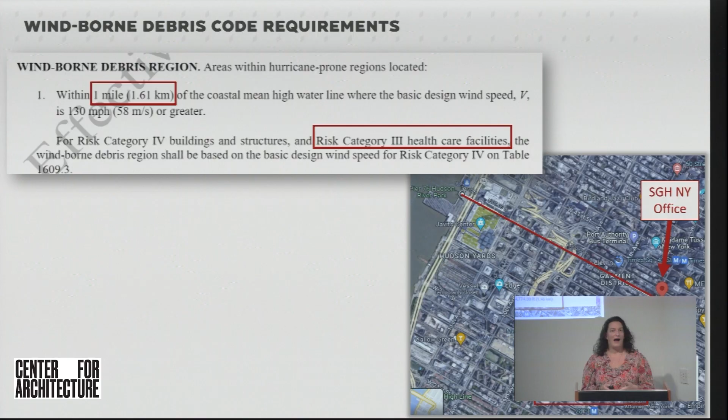So if you're within a mile of the coast, picture Manhattan. Here's an example, my company's office in Midtown. We're on 7th Avenue, within a mile of the coast. So if the building was to change use and decide to become healthcare, we would need to see how we're affected. If we were going to replace the windows, those new windows would now need to be wind-borne debris resistant. So just something to keep in mind as you're designing around New York City.

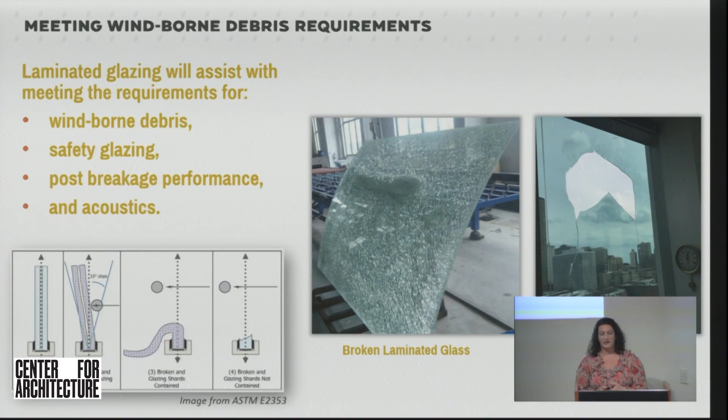Jessica touched upon it briefly, but wind-borne debris - laminated glazing is a way to counter wind-borne debris requirements. It also has other benefits as safety glazing. It has post-breakage performance, so it will actually stay on your building and keep water out after it's been broken. And if you need acoustic requirements anywhere, for a better performing building acoustically, laminated glazing will help you there as well. In terms of, you can specify tested systems.

There are many out there. Fortunately, Florida and other states are kind of ahead of us on this, and they've had requirements for tested systems for a long time, so there are things out there. Something to note is that it's generally accepted to get some water leakage, even in these tested systems, if you have long periods of combined high winds and rain. That's something people kind of miss. The standards and the codes do allow that.

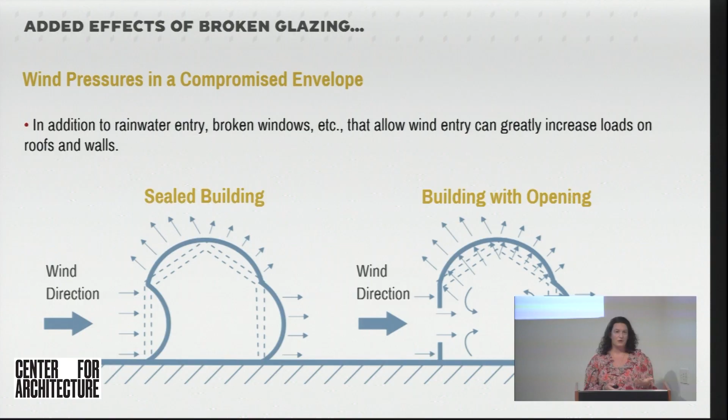And just a reminder, if you do have broken glazing, it's not just about the water entry within your building. Once you have openings in that building, it behaves differently, and you're actually adding wind load to your remaining walls and your roof because you're allowing that wind to enter into your space as well. So this could lead to roof blow off or other damaging aspects.

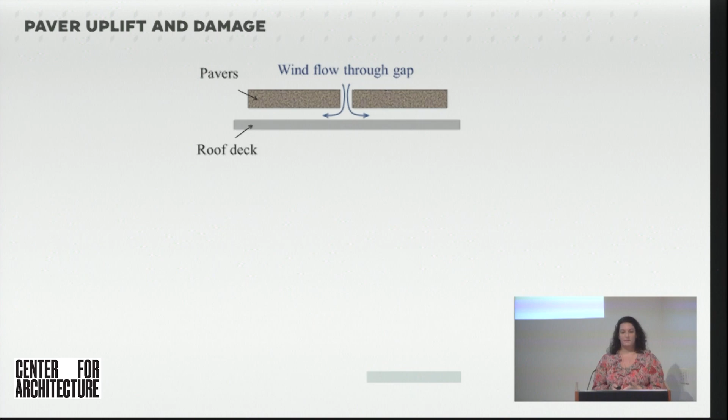And with pavers, it's a reminder that the wind flow through that gap can uplift your pavers. What that could look like is they could uplift and it's just a mess to fix later, or they could uplift and again become flying objects for your glass railings or your glass at the terrace if you have curtain wall, or for your adjacent buildings and your neighbors.

But there are standards out there, so I didn't mean to frighten anyone. I just want to bring us all to the reality of what can happen. But there are guides that can be followed.

So for your roof assembly, there is a free software out there, RoofNav. It's from FM Global, the insurance company provides it, and it has a list of tested roof assemblies. So if you know your wind uplift, and common is to have a safety factor of 2 in the industry, you can find assemblies, whether they're adhered or mechanically fastened, depending on your deck type, that can meet your project requirements. So just make sure you're specifying systems that will meet that, or put the requirement in there for others to give you the documentation.

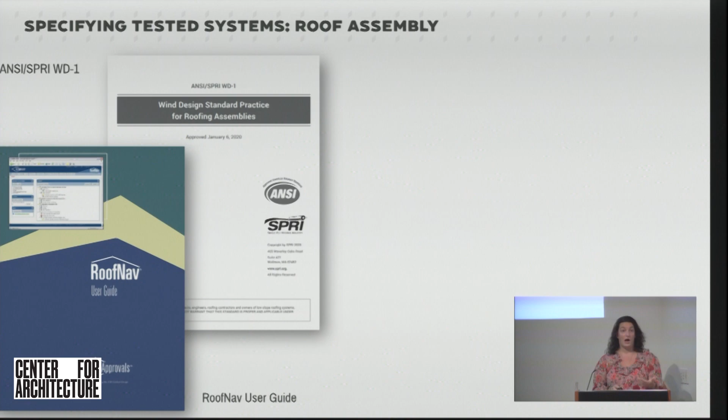There is also testing that can be done to make sure that the roof you're getting installed actually meets those standards and those uplifts, because it's one thing what's been tested in the factory and it's another thing how it's installed. So these are things you can specify to make sure that the building owner, the client, they're getting a roof that doesn't have to worry about these high wind conditions.

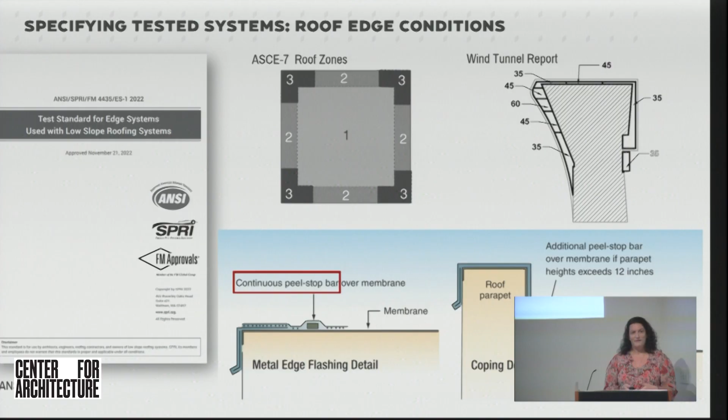And just as a reminder, the wind loads are typically higher around the perimeter of a roof and at corners. So these are locations where detailing is very important. If you notice here, we have these continuous peel stops. This can help avoid your roof blow-off situation. So if you were to get the roof peeling on the edge, at least with peel stops, you won't have the damage come across your entire roof system. And manufacturers can help you work through these for particular roof systems.

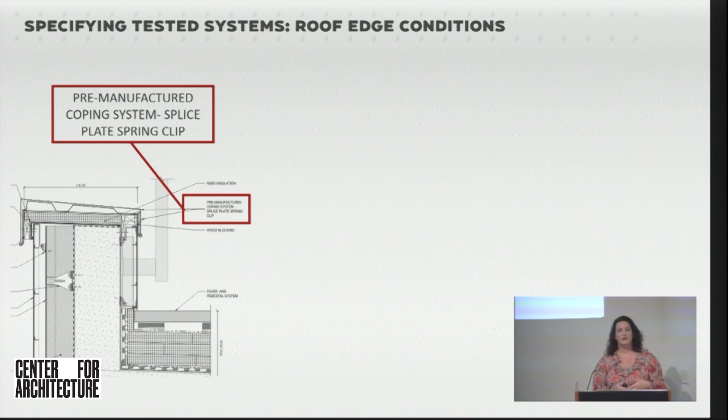So in terms of coping, it's important to specify a pre-manufactured coping system. Common practice has been to just have your roofer install some sheet metal and put some fasteners in. Who's responsible, where are those calculations coming from, how often are we fastening our roof system in? There are products out there these days designed and tested to meet all these wind requirements, so that burden is off of you, and you don't limit yourself to your roof installer if they don't have the capabilities of providing these calculations for you.

ANSI SPRI ES-1 testing requires you to pull on the top of the coping and the edge of the coping at the same time. This is an example of the rigorous tests these coping systems go through.

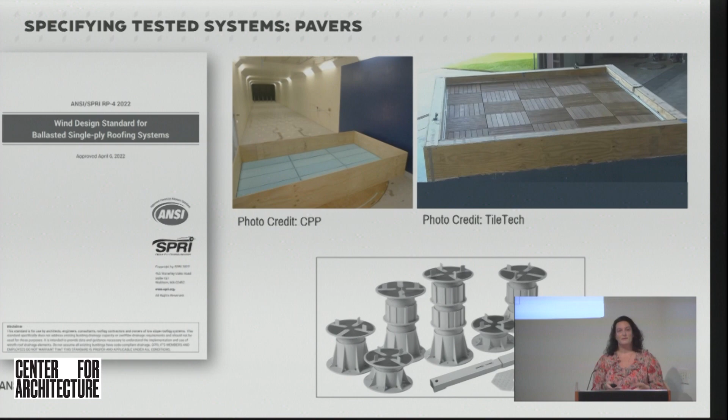Similarly, there are ANSI SPRI requirements for your paver systems that also get tested, so you can hopefully avoid some of those earlier photos we saw and the news of pavers flying off of balconies. These tests will check the spacing between systems, and you can use those values in your design.

Similar standards exist for vegetative roof systems, right? These are again situations where you can have your vegetation flying off in high wind. So even if your roof itself, what's under the vegetation, is designed for a high wind situation, we need to make sure that the vegetation that goes on your roof is also designed for that.

Consideration for rooftop equipment, right? It's the same thing. How is the load being transferred from the PV panels to the roof? All those connections should be able to withstand the same wind that your roof is being designed to withstand.

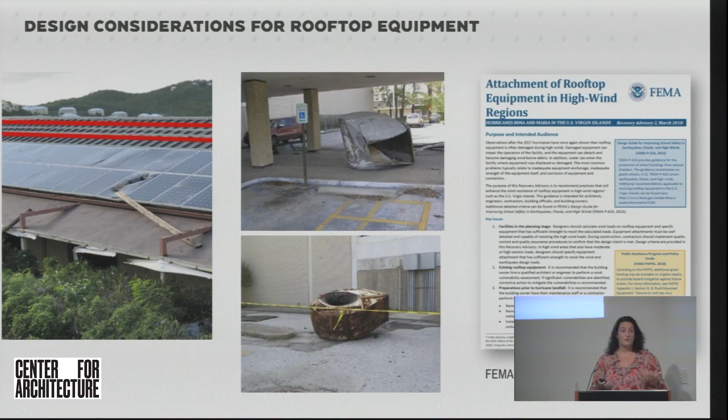So that concludes the enclosure portion of the discussion. But when we're implementing these things, we have to consider the impact on recovery. I alluded to that early on, because that's part of resilient design. It's not just what we're designing to, but how does the building recover and how does our community, how does New York City recover from this. We're helping with that effort to make sure we can survive these events and get through them with a little less burden. So if you're designing a resilient building, you're helping design a more resilient community.

And as designers, we're the thought leaders, right? So we have a collective responsibility to design these buildings for generations to come. I know Jessica mentioned 50 years, but realistically, these buildings that we have around us have been here longer than 50 years. We want our buildings to be around longer than 50 years. So we have to take into consideration, we know the codes are getting there, but they're not there yet. So the more informed we are, the more information we can provide to owners, and get ourselves to the future.

So that's it. We're going to do a bit of questions in a panel discussion forum, and then we'll open it up to the audience for any questions you guys may have. So think about those questions.